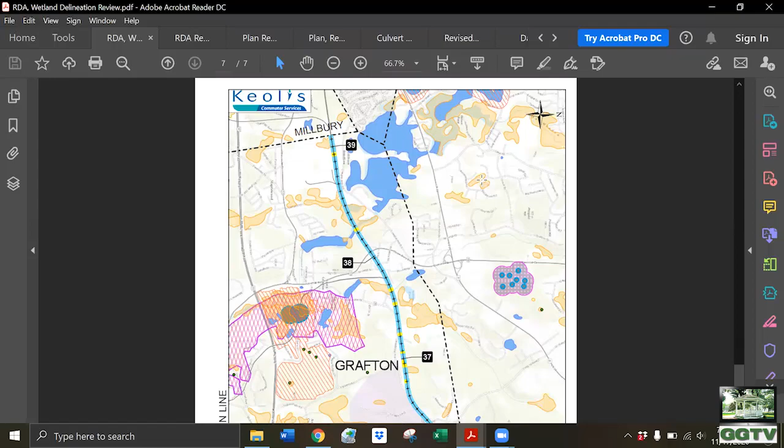Most importantly, the yellow zones will never receive any form of herbicide. If you scroll down you can see the key showing the limited and no spray zones. The yellow zones will never be sprayed outside of the track structure itself, which is federally mandated to keep free of vegetation with no alternatives. So the herbicide will always be directed straight down on the tracks.

As far as outside of the tracks, in the blue zones, which make up the remainder of your line, the track structure will always be sprayed. Outside of the track structure, that will only be sprayed on an as-needed basis if the vegetation and conditions call for it.

Because throughout your town it's all limited or no spray zone area, more effort will be put on physical and mechanical controls to manage vegetation, mainly because of the proximity to sensitive areas. If we can, we would rather use physical and mechanical methods in these areas over chemical application.

So I think that's a good overview of the process and the maps. If you have any questions, I can open the floor up to you.

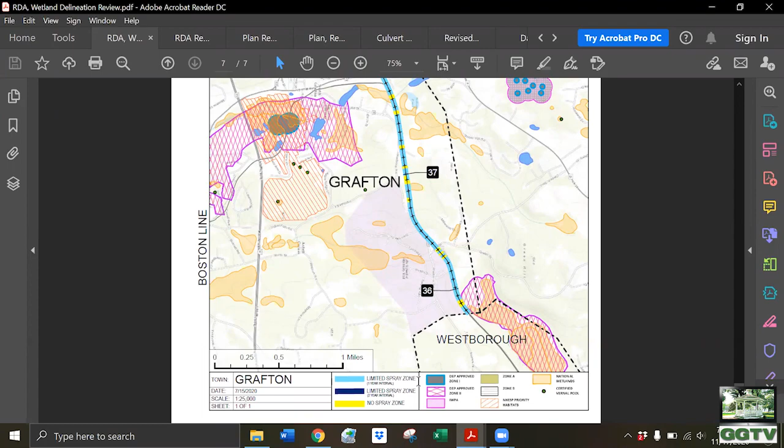Sure. Actually, yeah, I'll go through each one of the commissioners, and then we'll open it up to the public. I'm going to just start with a couple of questions.

So you indicated the difference between spraying to control vegetation and the physical and mechanical removal. Understood, and just to be clear, you indicated that spraying is only going to happen within the track area. Is that correct?

Yes and no, I'll take this, Matt. There are two spray periods within the year. The first is pre-emergent, applied between the first week of May and the first or second week of June. That is applied to the rail bed, the roadbed, but will also be applied and sprayed in areas where we can actually spray.

The no spray zone areas, the yellow areas on your maps, are no spray zone areas. And within those no spray zone areas, we will always need to spray the roadbed, regardless of it being a no spray zone area, unless it's an open deck bridge.

Thanks for that clarification. And when you say the no spray areas, those are areas within 100 feet to the wetlands? Is that how you define no spray areas?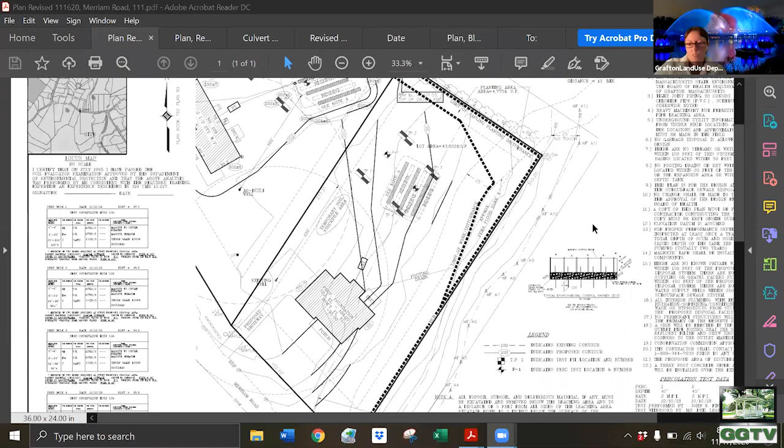Leah, can you just bring up the plan for one minute? Absolutely. Okay, that's what I wanted - so the septic system is there, and there's a proposed well, that's all shown on here. You show decks and a front porch and the driveway, okay. That was just making sure everything is shown on the plans.

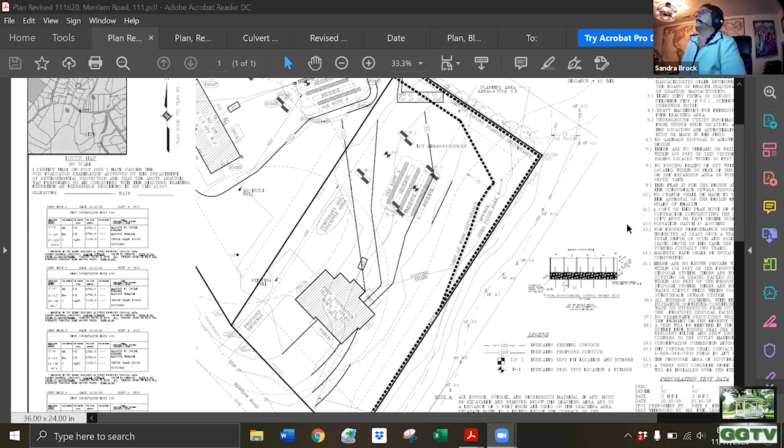As that goes on, we're going to talk about the request to grant a waiver for the work within the 25-foot no-disturb to the land subject to flooding. The request from the applicant is to maintain 4,775 square feet of grass area, proposing a mitigation of the same area. Again, this is that 25-foot no-disturb to the bordering land subject to flooding - not to the bordering vegetated wetland.

So I will just go around. Does anyone have any questions or comments on the request for the waiver? Patrick? No, I don't have any questions. Okay, John?

No questions. And Helen? I don't have any questions. Okay, so there's no questions from the public.

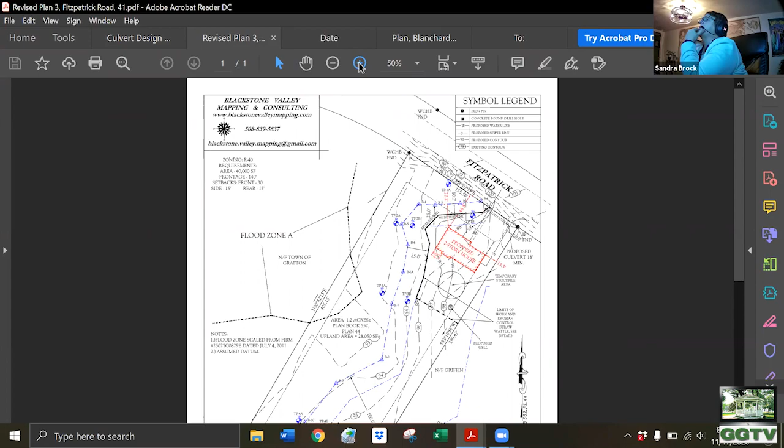It just leaves a little bit of a sour taste in my mouth that what we saw was a pretty modest house, and it looks like it's doubled in size. And now instead of, if you go back to the first one, Leah. Yep, she's got it. And I'm just looking at the distance between kind of the edges and the limit of work, and what's the likelihood of that 25-foot no disturb getting impacted because you're getting closer to it.

Well, what I would offer through the chair is that the limit of disturbance in that 25-foot no disturb area that you guys granted on the original plan was a retaining wall, and that's being maintained. Okay, so basically you've got a hard feature that would be limiting, and that wasn't indicated on the original plan, I don't believe.

I'm sure it was indicated in the writing of the order that would be signed, that no disturbance beyond that line. So you've got a hard feature versus what we typically see at the 25-foot no disturb, which is just signs every 25 or 50 feet, depending upon the nature of the project. So I don't see that being the issue.

I do understand your concern about the increase in the footprint. It's something I could get a number on for you shortly if you wanted to move on to something else. If that's one issue you want to see, what I would say is the percentage of building coverage for the lot is 3.2. So I'm guessing the original one was probably, just going by eyeballing it, more in the 2.8% lot coverage for the building footprint on the original plan.

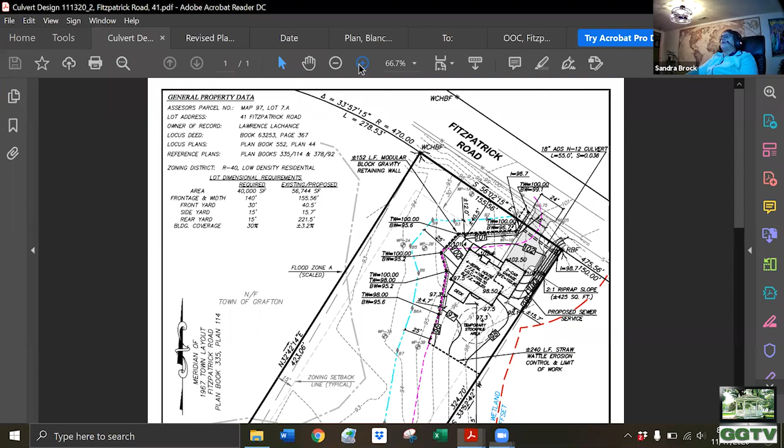So the finished floor elevation—the basement floor is 96 to 98. And then it's like half a foot down to the outside elevation, at 97.5. And then you hit the wall 5 feet away, and that drops another 3 feet or so, right?

Oh no, the top of wall would be 98 at the pinch point. The proposed grade would be 97.5 at the corner of the house, and the top of the retaining wall right next to it would be 98.

Okay, so just before that corner, you'll have a step in the wall from 100 to 98. So that house is going to be, I don't know, 10 plus feet above the grade at the bottom of the wall. So a little bit more than 10 feet.

So that house is going to be sitting way up, which is, it is what it is, type of thing.

I think to John's question is, you got a pinch point there but it's not really an area that people are going to use because of the drops. And how's it going to be constructed without entering the no disturb? Or that's my concern, is what are you going to have to do? Are you going to undermine that wall, or are you going to have issues with that wall because of the proximity of it?

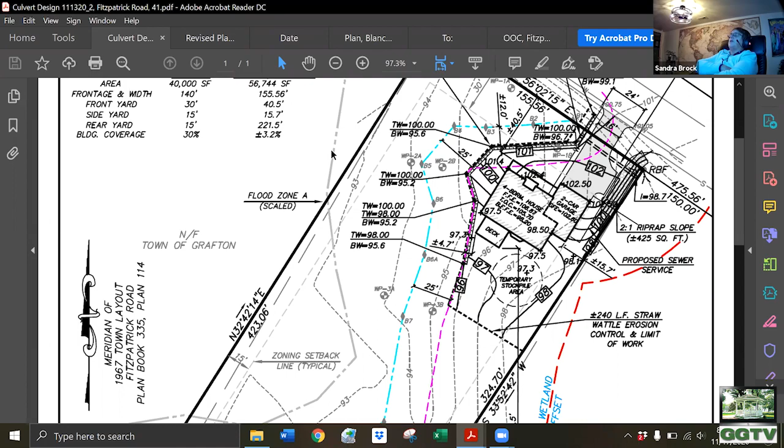To Brian's point, I thought for some reason, but looking at these grades, you're going to come in, install the wall, because when you look at the top of the wall versus the bottom of your footing, it's not that huge a difference. So they're going to put the wall in and have it exposed, it's a large block wall. Then you're going to put your forms in. It's going to be tight no matter what.

But I have a means and methods question. Yeah, go ahead.

I might have missed this, but is the retaining wall, if you're standing in the yard, coming up higher than the lawn? Or is the lawn up high and the retaining wall like a drop off?

So if we start at the wetlands and come across that 25 feet, it only comes up a little bit to elevation 95, and that's the bottom of the wall. Then that goes up about 3 to 5 feet, depending on where you are, on the house side. And from that corner, the closest point, the top of the wall is 98. The lawn right next to it is half a foot below that, and that's about the basement level, just below it.

And then the first floor is obviously 8 feet above that, actually it's more than that, it's 10 feet above that. So if you're standing at the wetlands line and look towards the house, you're going to see the face of the retaining wall, and above that, you'll see the house.

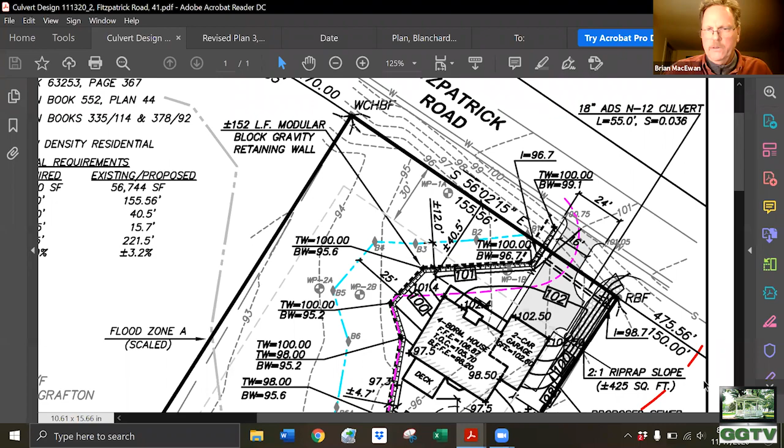Basically what we've done is taken the Blackstone Valley survey plan, and we were actually able to get his CAD drawing, so I was able to figure out what the actual grades were out there at the location where we wanted to do the driveway coming in at the culvert crossing. So we basically set the inverts of the culvert as specified on his plan at existing grades at the invert in and the invert out, and basically labeled that with the appropriate pipe that the contractor has agreed to use, which is basically smooth interior wall ribbed ADS N-12 standard culvert, 18 inch, 55 feet long, with a slope of a little over 3.5%.

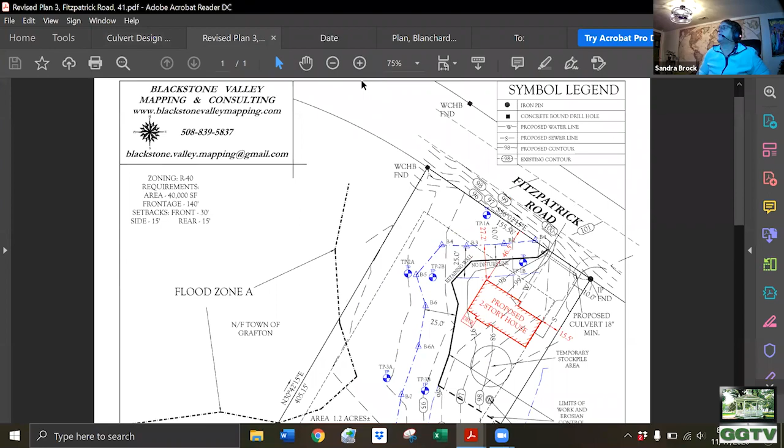Did the previous plan show a 12 inch? No, it said 18 inches. Okay. All right, no, I think that's fine. I was actually going to run the numbers and knock it down to 12, but the contractor said the original plan had 18 inches on it, so since you guys had already seen that plan, let's just stick with it. Right, I don't think the flows are going to be...

You know, I know in the previous public hearing, wasn't there, Leah, please remind me if my memory is correct or not, there was a couple of abutters that were concerned about that flow underneath the driveway, correct? Okay, so there is some water there that comes across the street and comes down. Yep. So that 18 inches, I think, is appropriate, based on especially what the abutters said.

Okay, right, and just for your edification, that pipe at that slope, flowing full capacity would be roughly 31 CFS, which is... Yep, that's a real large watershed area. Right. And from my perspective, a culvert like this in this type of location inherently gets blocked, so having an 18 inch there is just having additional capacity. Yep, so I don't think it's a bad thing.

So Leah, I'm pretty much okay with the way the culvert is shown. I do appreciate the fact there's actually a lot more detail on here. And there's just one question.

I'm just looking at where the retaining wall ends, and just trying to look at the grading on the west side of that culvert. On the east side, it's pretty straightforward, you've got the riprap, and then is there a wall there too? So is that going through the wall? Yeah, to catch the grades for the driveway. Okay, because on the original plan they didn't really show how the grades were going to work coming in from the roadway to the house. Yep, basically we're going to need to catch that grade with the retaining wall, and the pipe will have to daylight through that wall. Okay, no, that's absolutely fine.

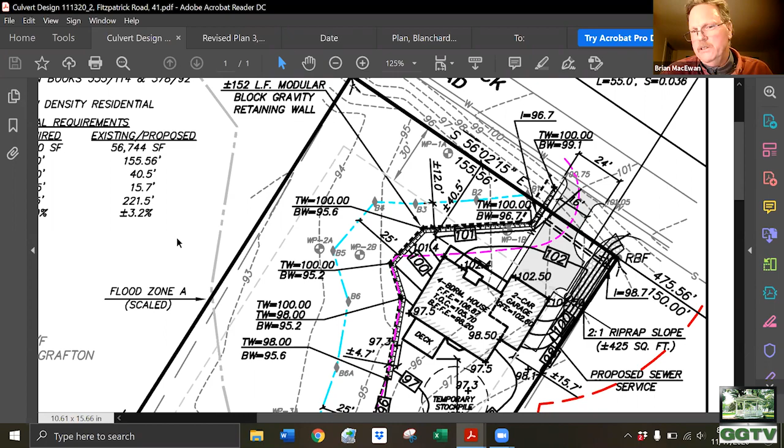No, this has more detail. I just want to make one last comment here. I know the footprint of the house went up, but the footprint of the driveway went down, because the driveway on the original plan wouldn't meet the spec for a curb cut by DPW standards. So that's been reduced - the throat reduced to 16 feet and 24 feet wide, whereas it was quite a bit wider. So we've reduced the impervious area. The net impervious may be pretty close to the same as under the original plan.

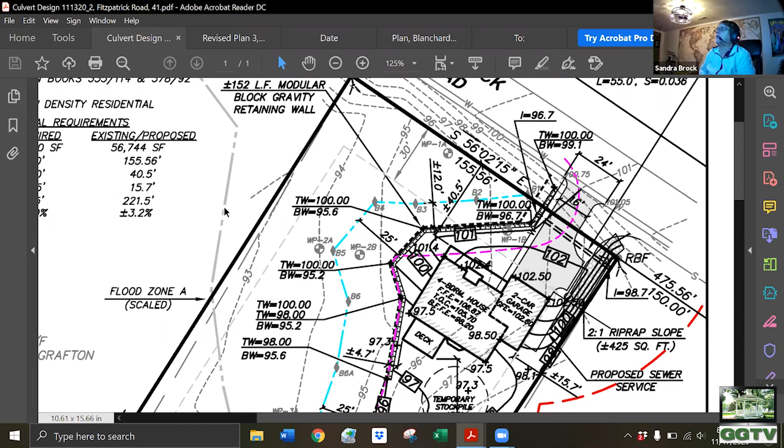So just to close out this conversation - we've talked through the retaining wall, the hard line, recognized the increase in the building footprint, and taken a look at the culvert. I think the culvert is demonstrating enough detailed information right now. Is there a flared end section on the east side of that culvert? We didn't spec one - if you feel it's necessary on a 2-to-1 riprap slope.

Yeah, just something so you don't have the pipe sticking out. There's a bunch of different ways of doing that. I understand on the riprap 2-to-1 you could probably shape it and so forth, but I'll leave that to you guys. I don't think you specifically need to do a flared end section.

So, Leah, what do we need to do - vote that this is okay, or how do we want to do that? Make a motion to approve the culvert design. Okay, do I have a motion? A motion to approve the culvert design. Do I have a second? Second. All right, we'll do a vote, a roll call. Patrick, yes. John, yes. I am also a yes.

All right, thank you for the additional detail and conversation. We were a little bit taken aback by the growing size of the house. Before we terminate here, one question I'd like to ask - they're in the process of submitting for the building permit. What is the status?

The contractor wanted to coordinate to get the arborist in to do the clearing. I understand, though I haven't seen it, that the erosion controls are in. Is that fine with the commission for us to get access into the site and get the clearing done within the limit of work prior to getting the building permit?

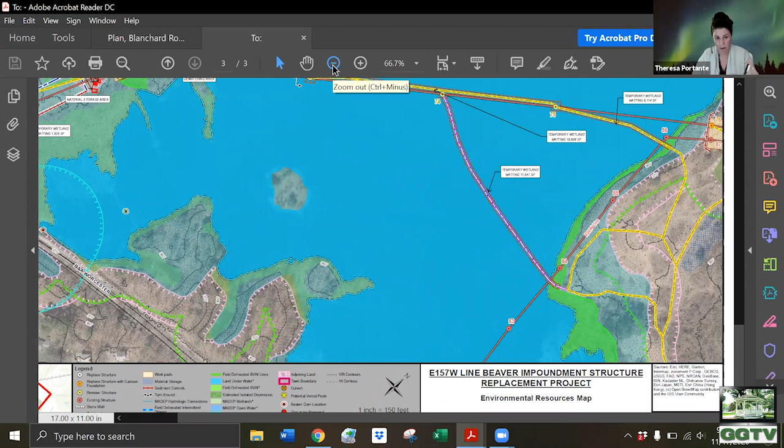So the layout here, there are 2 options they're evaluating to get into this location to remove these 3 structures, 73, 74, and 75. The timeline to remove these structures is about a month, so the matting will only be in here for a very minimal period of time to actually get these structures out. They're only proposing to remove the above-ground component of the structures, so they don't need a lot of work area, but because of the water itself, they need several layers of matting if the water isn't drawn down.

Okay. And the structure, just a brief description of the structure itself. They are H-frames, basically 2 poles, and in the center of these structures there's a big X brace, but they're wood pole structures. Just a general description, is it a pole, just to understand.

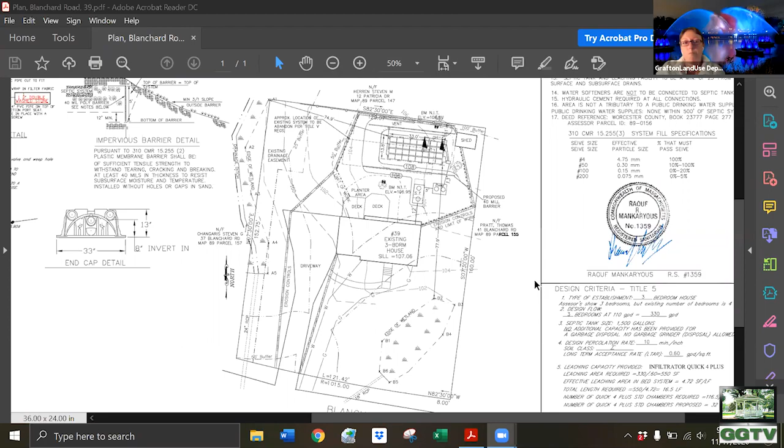That's pretty much it, Leah? Yep. Okay, I'll go around to the commission. At this point, I don't see any value in proceeding with this based on what actually happened with the emergency replacement. Patrick, any other comments? No. John? No other comments.

Okay, so that's our suggestion to you, is to withdraw without prejudice, and you can say it now, but also if you could follow up. I'd like to withdraw without prejudice. Thank you very much. And then if you could follow up with a written email or letter, that would help our record keeping also.

Okay, I do want to say thank you, Samantha. She was great throughout the whole process. I don't wish doing a septic replacement on anybody in the entire world, so she was great, thank you. That's good to hear, I always like to hear those things.